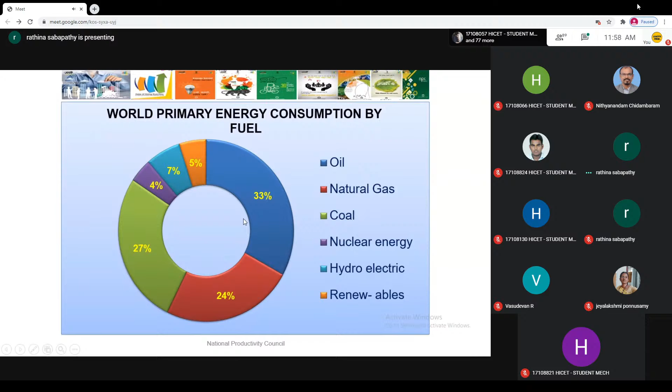See, we told that we are going to give examples of industry A and industry B. So first one industry. First we take the energy intensive equipments in industry. So what do you mean by energy intensive equipments? Means the equipments which are having maximum capacity in kilowatt or horsepower, that we call energy intensive equipments. Because there may be a number of equipments in the industry when you enter into an organization with the objective of energy conservation and energy efficiency.

So if you take the case of the company where I work, Ashok Leyland or Praga Tools, number of machineries in Ashok Leyland more than 1,000, and generators more than 10 to 12. Similarly, compressors, cranes, floor cars like that. And if we take Praga Tools, we have hammers, trimming presses, compressors, cranes, furnaces, large in number. So how to start? You have to take the vital, that is, which are having maximum capacity.

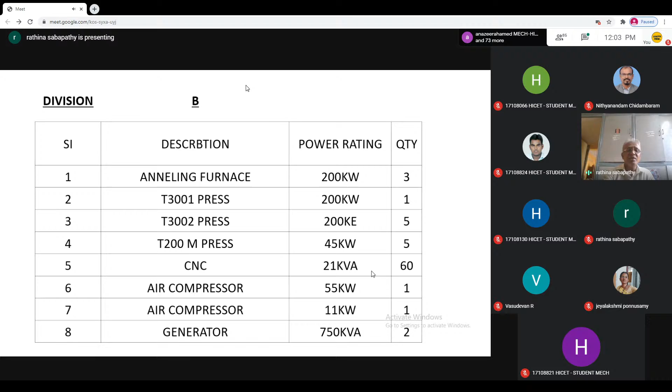So in this industry B, these are all the equipments, machineries available. It is more of compressor, press, generator. You see here, forge shop. They have the induction heating, press, compressor, furnaces. So now you get an idea of these industries. What are all the equipments available here? And what are all the capacities? So you have to focus your idea in such a way you do some projects on these machines, so that will give maximum benefits.

Now, second, we are going for some of the case studies, so that gives an idea for you how these benefits are achieved, and it gives you a motivation to do more projects. So once you do something and you get some benefits, that gives you a motivation that we are getting benefited, so you do some more. So that is the background.

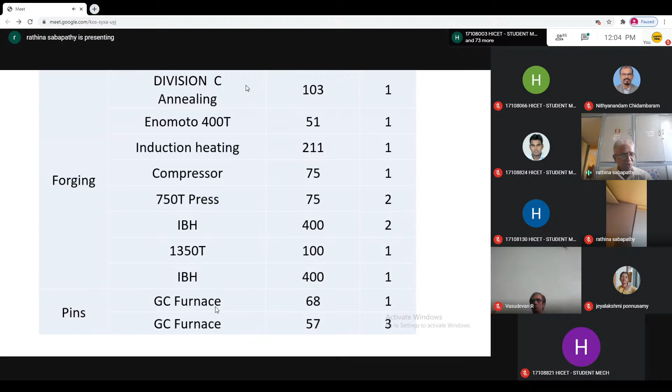So if you see here, PCRA has done a project survey and given guidelines, and the industry, one forge shop in Tamil Nadu, was able to save 12 lakhs per annum. How they saved 12 lakhs? By reducing the consumption of energy, 9.63 lakh units per year, and then 316 KL, kiloliters, of furnace oil they have saved. How they have done it is by concentrating on these 5 factors.

So these are all the areas recommended by PCRA to the industry, and they adhered to this, and they are able to save this 12 lakhs per annum. How have they done it? Electricity utilization, transformer load management, motor load study, heat distribution, furnace energy use. These are all vast subjects. Due to shortage of time, we will tell briefly, then you can understand and go elaborately afterwards.

So electricity utilization: you can take any industry, the energy bill will consist of 2 major components, that is consumption of energy and then maximum demand. What is the maximum demand? And then there is another column in that: peak hour energy consumption and non-peak hour energy consumption. Each industry has got a maximum demand. They might have applied to the electricity board and got the approval, and they have to adhere to that. If they exceed that, a penalty is to be paid by the industry.

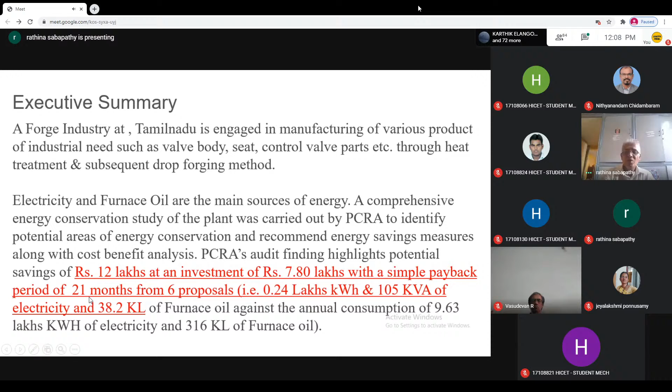And here this is a second case. So by adhering to all these practices of energy utilization, reducing transformer losses, using various latest motors, reducing the rewinding of motors, and heat distribution in the furnace, they are able to achieve 12 lakh savings per year. So this is one of the case studies that is applicable to most industries. That's why we have given this first example.

And the second one is energy efficient motors. See here, this output is 23.37 kilowatts delivered by the pump for pumping purposes.

So the input here you see is 47.2 kilowatt for the existing motor. You can replace it with a high efficiency motor, which has only 44.7 input. So input is reduced, output is maintained. So there is a saving in energy also. 50 units per day. If you calculate for a year, it will come to 1.35 lakhs.

So this amount of money, if you compare it to the cost of the motor, if it is 1 lakh, we are able to retrieve this money spent within 1 year. It is called the payback period. So you have to highlight, when you are projecting for procuring a high efficiency motor, that the payback period is 1 year. Then the management will immediately approve, and you can procure the new motor and get the energy saved and money

saved for the organization. And moreover, the new motor will be maintenance free. It will work in the beginning for 4 to 5 years without any problem. In that way also, it gives uptime and reduces the loss of production. These are the things you have to highlight for going for new technologies, so the management gets convinced and goes for highly efficient motor procurement.

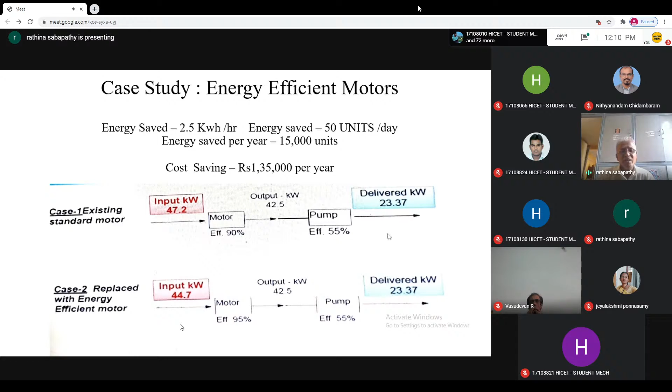And the third one is understanding the process and utilizing the equipment available. This is the third case. 1 minute.

See, in the case of a compressor, what they have done, compressor setting pressure.

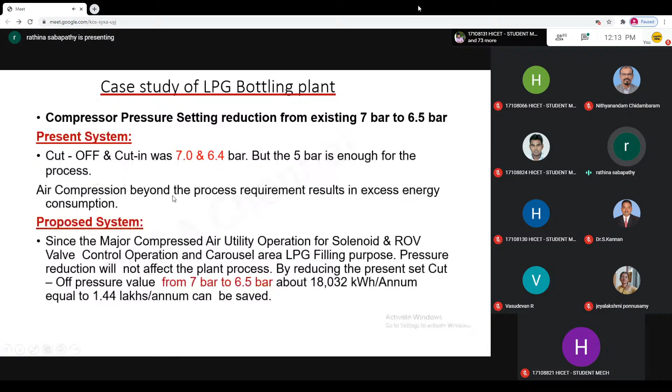So the energy saved is 18,000 units per year and 1.44 lakhs per year. So it's the energy saved. The process is not affected, it's only 5 bar, but the energy is saved. So the concept here is to understand the process and understand the equipment's specification and do adjustment in such a way that the production is not affected and energy is also saved.

And here another case is energy saving by using the power saver in air handling units. 1 minute. So this is the power saver unit. We have the power saver installed in these air handling units.

In the air conditioning of one big building, they are using 11-ton packages, 3 numbers, and the normal energy consumed per hour is 17.5 units. After installing this power saver, the energy consumption is only 12.7 units. So energy saved is 4.8 units per hour for 1 unit. So the percentage saving is 27%.

The concept here is they utilize the power saver unit that is wall mounted, independent of this equipment, and this controls the idle running of the compressor by the thermodynamic saturation principle. The idle running of the compressor is cut off so that the energy is saved. This is one of the concepts. It is applied in Ashok Leyland, and they also use this power saver concept in railways and all. Many railways have implemented it.

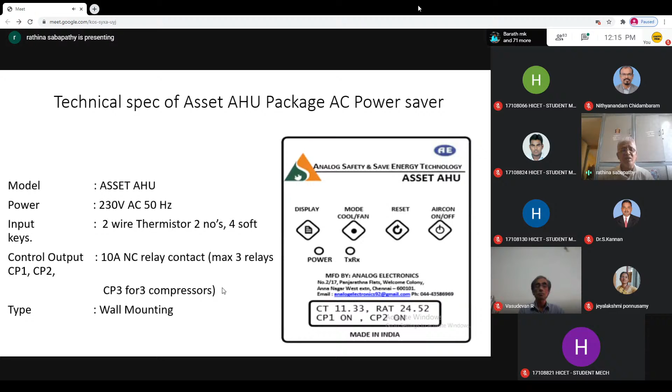So the idea here is you should know the latest technology available for power saving in air conditioning and all, so that you can utilize it for energy saving and money saving. Now we have seen 4 cases. The first one is in the forge shop, by way of various load control and all, you are saving energy. And the second one, you have seen the compressor energy efficient motors.

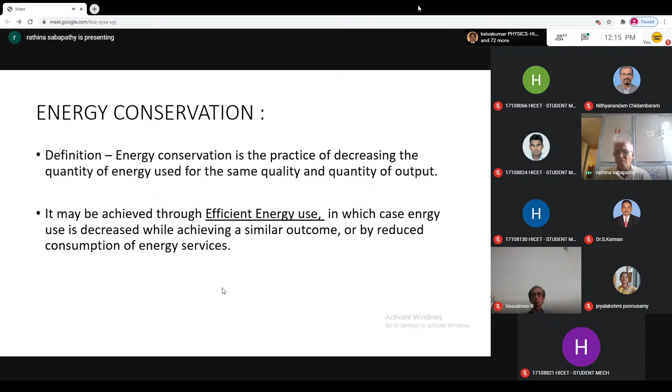The third one is to understand the process and adjust the cut-in and cut-off of the compressor. And similarly, latest technologies like a power saver. So these are some of the examples for you to apply, and you can go for similar applications for conservation of energy.

Now, energy conservation means in any industry or any organization, they revolve around only 3 factors: quality, delivery, and cost. The quality should be high, delivery should be on time. These 2 are only for continual improvement. You cannot compromise on these. So the only available third factor is cost, which consists of material cost, labor cost, and all overhead cost. So you have to reduce the cost.

So the cost is the only factor that you can reduce. By way of reducing the energy bill, by way of energy conservation and energy efficiency, you can reduce the cost. So it will become more competitive, and your organization will be sustaining and growing. So in this way also energy conservation helps for the survival and growth of the organization.

And energy conservation and energy efficiency, the difference. Energy conservation focuses on the behavior of the people. Example is use the daylight instead of tube lights. That is energy conservation. Energy efficiency means focus on the equipment or machinery being used. Use LED bulbs in case of ordinary lights and lamps; you replace them with LED bulbs. So this is an example of equipment and machinery, using the latest equipment, so the energy is saved. This is called energy efficiency.

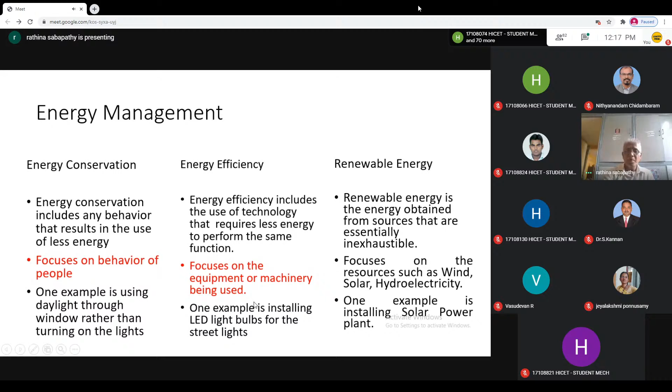So as an engineer, you have to apply both energy conservation as well as energy efficiency by way of knowledge and practical comparison with various industries. So you apply both and get the benefit of energy saving. And here the benefits go to industry as well as nation as well as globe. Industry is getting benefited by competitiveness. Nation is getting benefited by reducing the energy imports. The globe is getting benefited by reducing the greenhouse gas emissions.

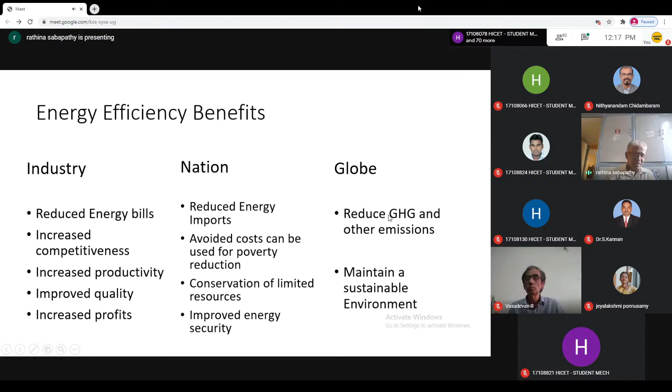And here there are some principles that we have to adhere to while doing this energy conservation. As I have told already, health, safety, and environment should be protected, you have to understand the process, and it should be done at the design stage itself. We will see one more example here. And it's teamwork, right? From contract labour to MD, everybody is using energy. So everybody has to consider this teamwork, and you have to upgrade your knowledge and skill with the latest technologies. These are all the principles you have to apply for energy conservation and energy efficiency.

And I have told already about thermal utility and electric utility. Things like boilers, furnaces, etc. come under thermal. And electrical: motors, drives, pumps, air conditioning, buildings, these all come under electrical utilities. And in energy conservation, industries will take the engines, diesel generator engines. So you should know the parameter to observe for conservation. In the case of engines and generators, you should observe the smoke in the chimney. Hazy brown smoke is the indication of proper combustion, that the fuel is properly utilized.

If black smoke is coming, you might have seen in some of the old vehicles and some autos going with black smoke, black smoke indicates improper combustion. So you have to find out the root cause in the injection or fuel system and eliminate the black smoke, so the energy is saved. Similarly, white smoke indicates excess air. So you have to find out the root cause in the air system and eliminate the white smoke. So in this way, by observing the performance parameters and indications, you have to take action for conservation of energy. In the case of engines, the smoke observation is important. In generators also it is applied.

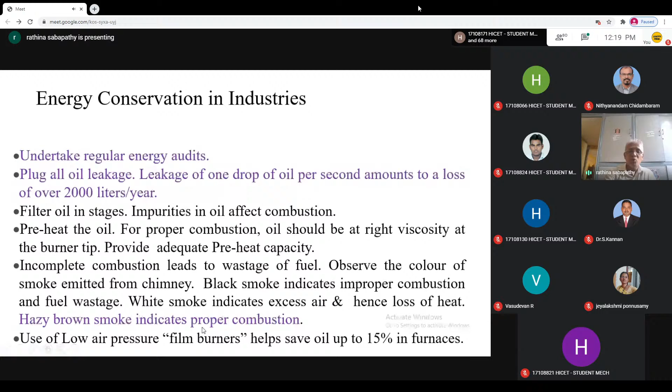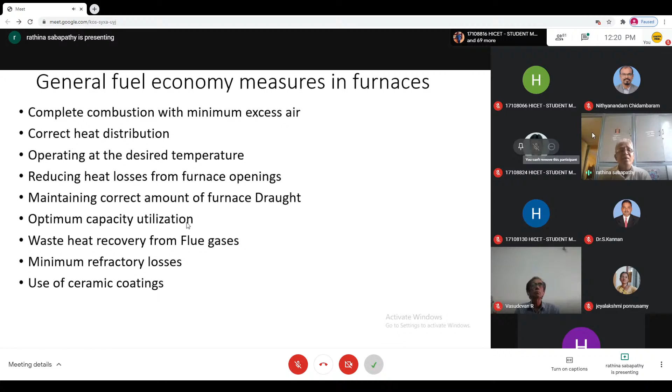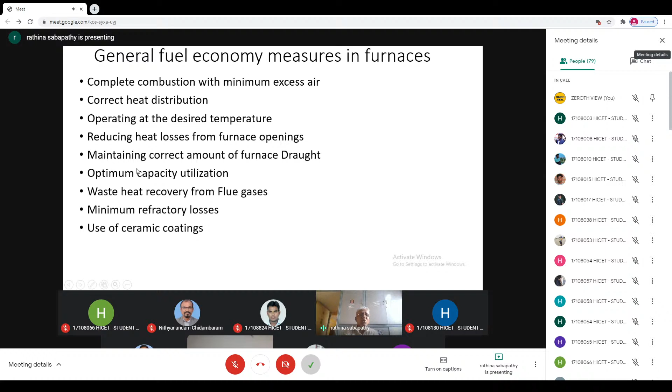And here in furnaces, these are all the measures of fuel economy, the opportunities. Complete combustion with minimum excess air, correct heat distribution, operating at the desired temperature, reducing heat losses from furnace openings, maintaining the correct draft, and optimum capacity utilization, because if the furnace is available and you are not utilizing it properly, a lot of fuel is getting wasted. So you have to load the furnaces for optimum utilization. Waste heat recovery from flue gas, as I told you, you can use it for water heating and use the heat at other places. And minimum refractory losses: the furnace will have refractories, so they should be selected so the losses are minimized, and use of ceramic coatings. These are all the avenues for fuel economy in furnaces.

And as I told, at the design stage itself you have to think of conservation of energy. I worked in Praga Tools where they have hammers, trimming presses, furnaces, compressors, burners, water pumps, all those things. So you should know the data for each thing. The hammer uses a 5-inch inlet and 6-inch outlet for compressed air. This is the operation of the hammer.

So you can imagine the consumption of compressed air, 5-inch pipeline for operating the hammer. And then a ring main circuit is using a heating of 70-degree temperature by using heating coil, and you have to maintain the insulation. And the burner types, and the burner is using blower 5 HP. And then brickwork, we have seen the refractories. We have to select the refractories with the minimum loss, and then compressor specifications, and some water capacity or location of water pump nearer to the compressor room, like that.

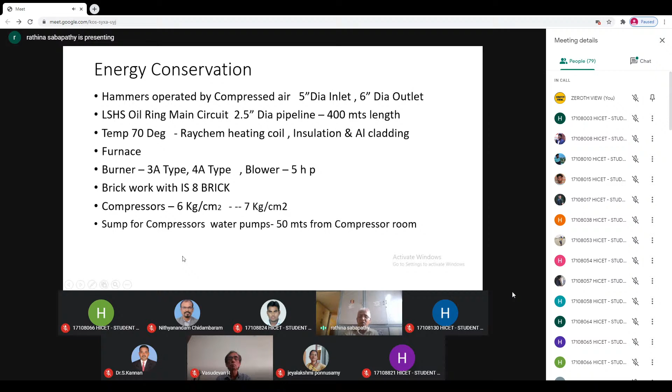So you select the layout in such a way that the furnace, hammer, and trimming press, this is one cycle. The material is heated in the furnace, it is brought to the shape by hammer, by forgings, and then it is trimmed, the excess material is removed, and it is taken out. So the travel should be minimized in such a way the layout should be laid so that the losses or heat losses are reduced.

If you keep it at a longer distance, then the heat losses will be more and the energy consumption will be more. Similarly, compressor room, we have seen the compressor, a 5-inch dia compressor for operation of hammer. So the compressor room should be nearest to avoid the losses. So this is one case where you have to think of layout design in such a way that the losses are reduced and take the process into consideration.

And similarly, we have another example of generator house where we have energy conservation opportunity, boiler. See, we have the boilers. In boilers, what are all the energy conservation opportunities you can see? See, stack temperature reduction, 22-degree reduction in stack temperature leads to 1% boiler efficiency. Feed water preheating using economizers improves boiler efficiency. And the combustion air preheating gives thermal efficiency increase.

Incomplete combustion is to be avoided. Excess air control is to be monitored. And blow down heat recovery, you can get efficiency improvement and reduction of scaling and soot losses, and variable speed control drive for fans, blowers, and pumps. We will be seeing VFD in the coming slides. And effect of boiler loading.

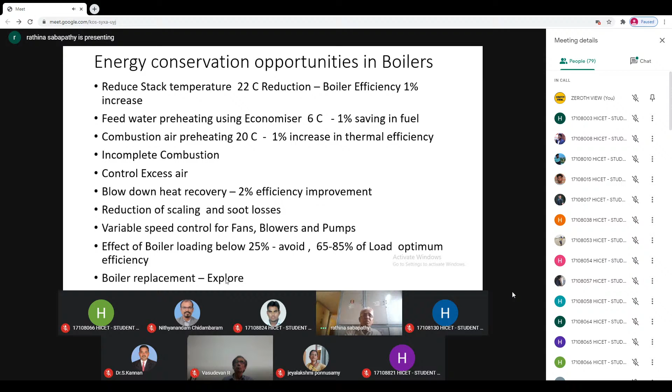Similarly, furnace loading, boiler loading is also important. Less than 25% load is to be avoided. And then 65 to 85% loading is the optimal efficiency for boiler. And boiler replacement, you have to find out the various performance parameters of boilers. And if it is very away from the standard specified, abnormal gap is there, you cannot improve it, then you have to go for replacement.

And diesel generator, you can see this is the generator available at Ashok Leyland, where I worked as a maintenance engineer around 2.5 decades back. So here we have a high tension generator, 1100 kVA, 11,000 volts. In this case, specially, an individual fuel injection pump is there for each cylinder. In our buses and other things, you take only one fuel injection pump for all cylinders. Here, individual pump. The idea is, if any power loss is there, you check each and every cylinder pump is working properly or not, take corrective action to eliminate the problem, so that the required power of 600 kilowatt per generator is achieved.

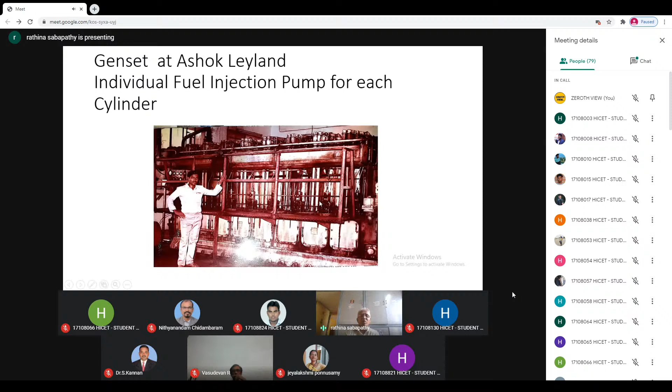See here what all the parameters. Here 1100 kVA, 11,000 volt gensets. The parameter here is 3.3 units per liter. That is the fuel efficiency of the generator. You have to monitor it. If it is less than that, you have to take action, observe the root cause and eliminate it in the fuel system, air system, like that. Then you have to achieve it. That is the purpose. And power factor you have to maintain at 0.9.

And load sharing is to be done. Each generator 600 kilowatt means you have to load it. If it is less, you have to share the load, and if not required, you can switch off one generator. Suppose 1200 kilowatt is there. You are operating 3 generators at 400 kilowatt. So you can share this with 2 generators, stop one generator. So these are the things you have to do in running of the generators.

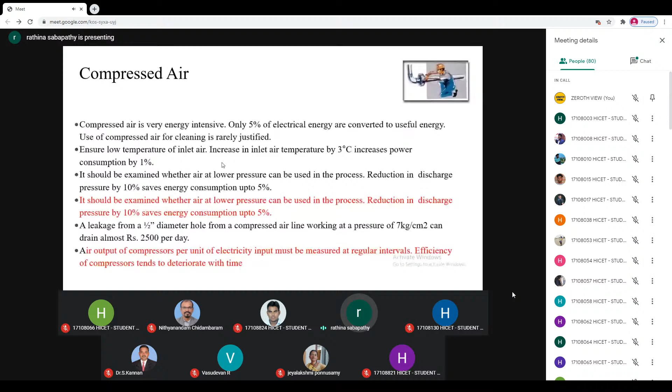And periodical maintenance is very important for engines, fuel injection, like that. So these are some of the things you have to take care of and monitor the performance parameters, so that the energy is saved and fuel is saved. And here we have compressed air, we have seen some cases. And here in cooling tower we have on-off switches. It should be made automatic, and you can use PVC fills, which are latest, instead of wood for cooling tower applications.

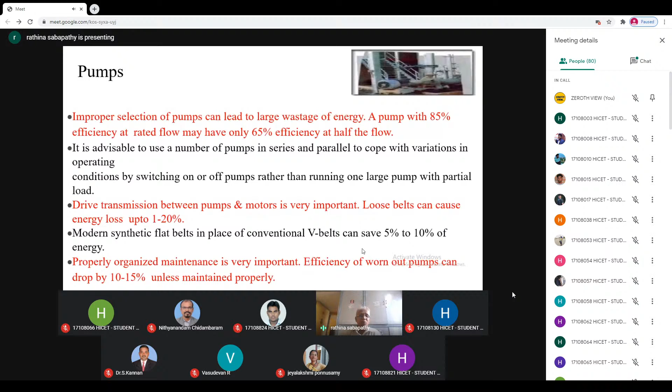And water pumps: your selection of water pumps is very important, and the alignment of the water pumps, and use a flat belt wherever possible instead of V belts. That saves energy. Like that, you have to take care of selection of pumps, then drives, then alignment, from the maintenance point of view. All this you have to take care of in case of pumps.

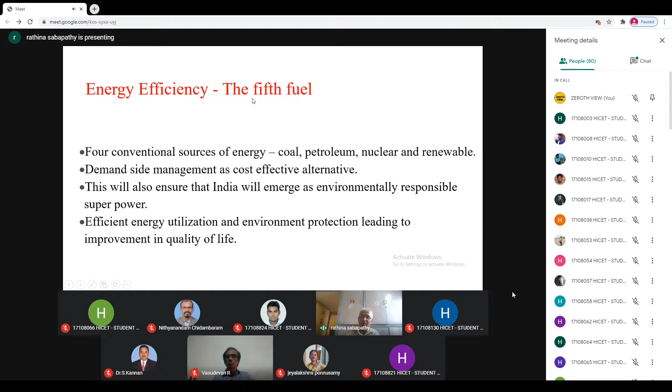And energy efficiency is the 5th fuel. The 4 fuels are coal, petroleum, nuclear fuel, and renewable. The 5th fuel you have to concentrate on and improve. And here, energy conservation at the design stage, you have already seen it.

And electric motors: in the motors we have 2-3 important points. One is the life cycle point. Initial cost is only 12%. The running cost, what we are paying as energy bill, is 88%. So the total life cycle cost you have to understand. And if you go for energy efficient motors, slightly higher cost is also accepted. That will reduce the running cost, total cost will be minimum, and the energy bill will be reduced. So this concept you should apply with selection of motors.

And similarly, rewinding of motors. The motor gets burnt for various reasons, that is overloading, bearing failure, oil leaks and all. So when you are going for rewinding, you have to take a decision whether to rewind or replace based on the parameters of the rewound motors: no load current and stator resistance per phase of a rewound motor compared with the original resistance at the same temperature, versus the efficacy of the rewinding. So you have to take data and monitor it. If it is beyond the acceptable limits, then you have to go for replacement of the motor.

And similarly, in the case of latest technology, go for variable frequency drive. What are the benefits of variable frequency drive? Power line issues are reduced. You can control the speed by varying the frequency, and energy conservation is achieved. So in the case of motors, go for energy efficient motors, consider total life cycle cost, and go for variable frequency drive motors. These things will help you for energy conservation as well as energy efficiency.

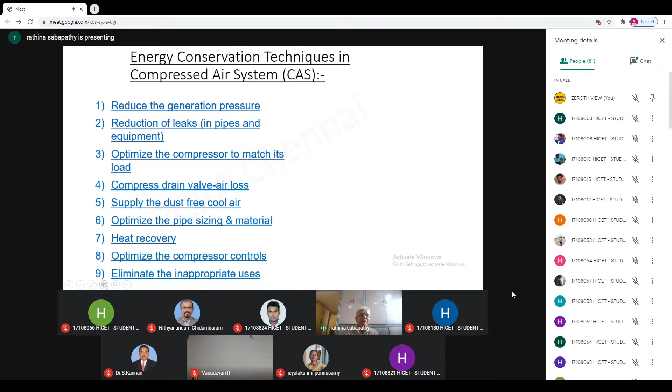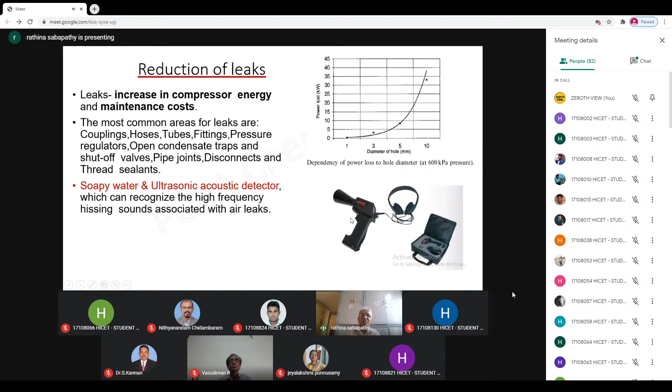And in the compressed air system, you should avoid leakages, do heat recovery from the intercooler, and use latest technology like ultrasonic sound detectors for leakages. Compressed air is very costly. One unit at the utilization point is equivalent to 5 units at the generation point; 1 unit saved is equivalent to 5 units generated. So compressed air leakages you have to avoid, and for identifying them you can go for latest technologies like ultrasonic sound, detect the leakages and eliminate them then and there.

And also we are going for solar. What is the reason? It saves money, saves the environment, gives energy independence, and increases the property value. As an engineer, we have a lot of options when going for solar, on grid or off grid. If you want continuous supply with battery, you go off grid. When you want only the grid, no battery is required, so power will be available whenever you have grid connection. Each has its own pros and cons. So you have to study the environment, your situation and application, and select accordingly.

Similarly, you have roof mounted and ground mounted. Take Ashok Leyland: we have done roof mounted for 1 megawatt because roof area is available from the various number of shops. Take the case of NLC, Neyveli Lignite Corporation: they have ground mounted nearly 10 megawatt because ground space is available there.

Similarly, you can go for CAPEX or OPEX model. The CAPEX model means you own the equipment, you maintain it, and you utilize the energy. The OPEX model means the equipment is owned by somebody, a developer, and he is maintaining it. You are paying only for the energy utilized, but that energy cost will be less than what you buy from the electricity board. So you have to decide whether you want the CAPEX or OPEX model. These are the various options in solar application.

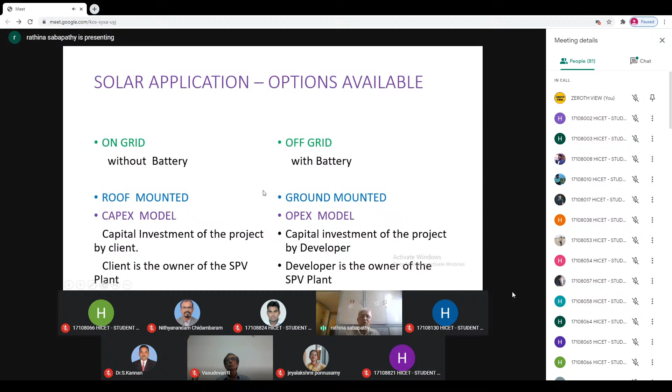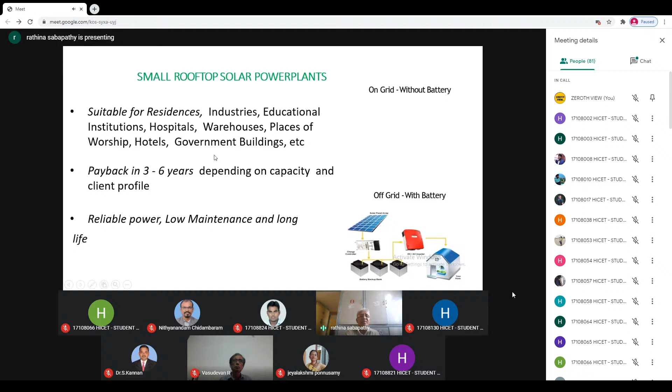And here, this is a case of on grid, off grid, and the payback period. It is suitable for residences, hospitals, warehouses, places of worship, hotels, etc. And the payback period is 3 to 6 years, depending upon the capacity. And then we have to...